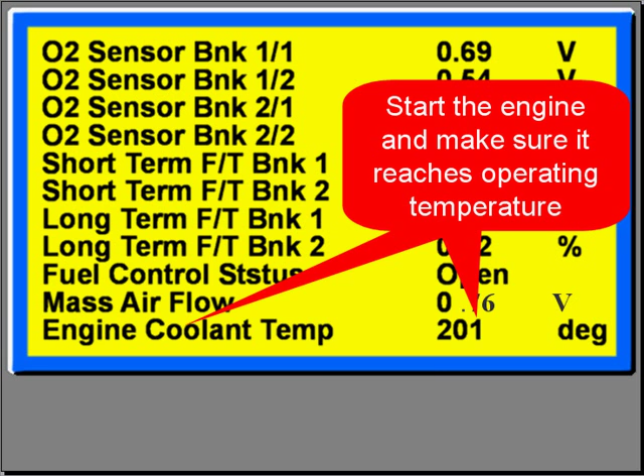Start the engine and make sure it warms up to operating temperature. Make sure the system closes loop. If the system doesn't close loop, check the oxygen sensor operation and the ECT. The oxygen sensors must be working normally before testing the fuel system.

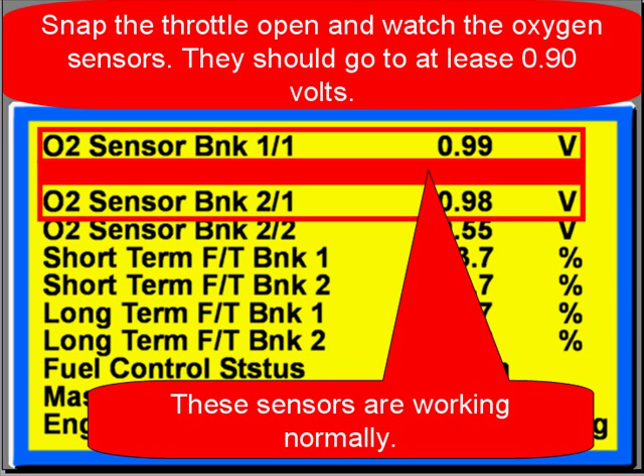Snap the throttle and watch the oxygen sensors. They should go to at least 0.9 volts, as in our example here where the sensors are working normally. These sensors are not working normally. When we snap the throttle, one went to 0.6, the other went to 0.4. They are not working normally.

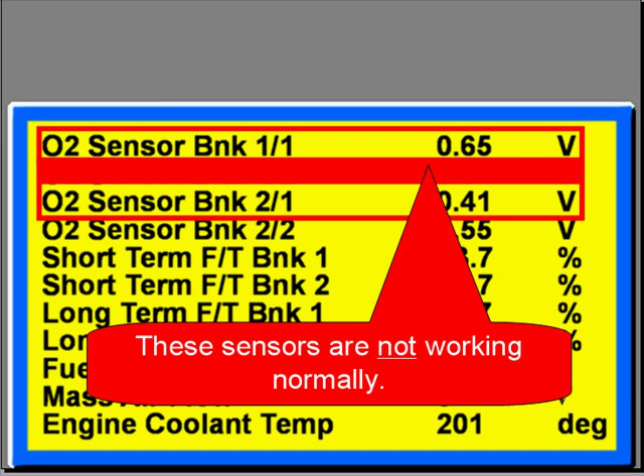If the sensors don't respond normally, add propane to the engine to see if you can get them to measure a rich condition. If the sensors respond normally with propane enrichment, go to fuel pressure volume testing and find out why you're not getting enough fuel on the snap. If the sensors do not respond normally with the propane, replace the oxygen sensor that does not respond. In this case, we're showing you one sensor has to be replaced.

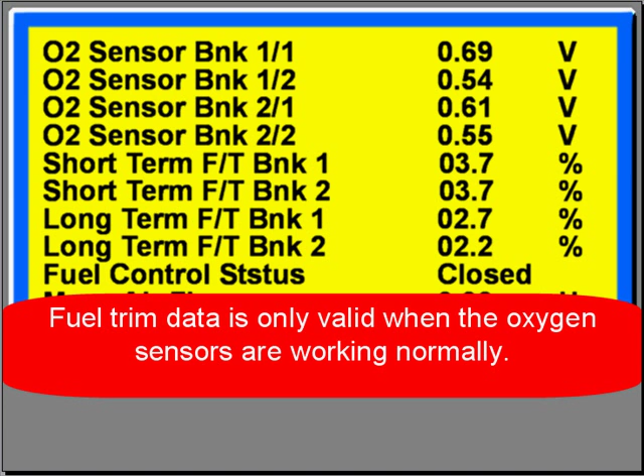Fuel trim data is only valid when the oxygen sensors are working normally. That's why we had you do them first. Look at long-term fuel trim. Ideally, it should be under plus or minus 5%. In our example, they're under 5%.

On vehicles with high mileage or not maintained that well, you're going to have to put a fudge factor in there. So long-term fuel trim should not exceed 10% in those cases. You can see that they're under 10% in our example here, but they're over the ideal 5%.

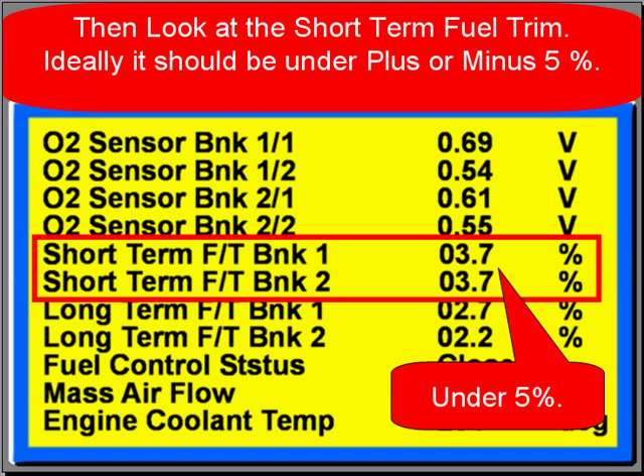Then look at short-term fuel trim. Ideally, once again, it should be under plus or minus 5% like our example. On vehicles with high mileage, put the fudge factor back in and use under plus or minus 10%.

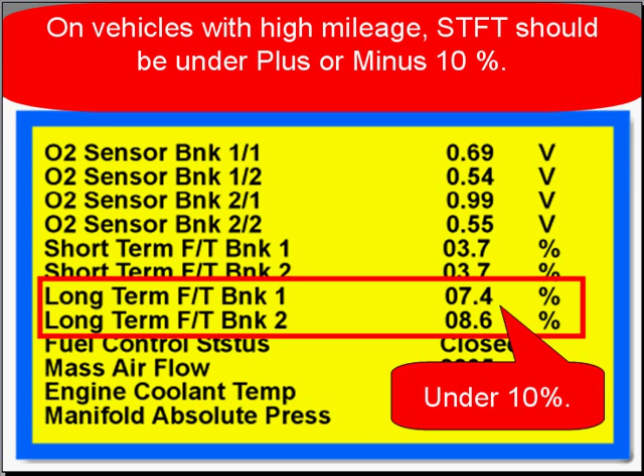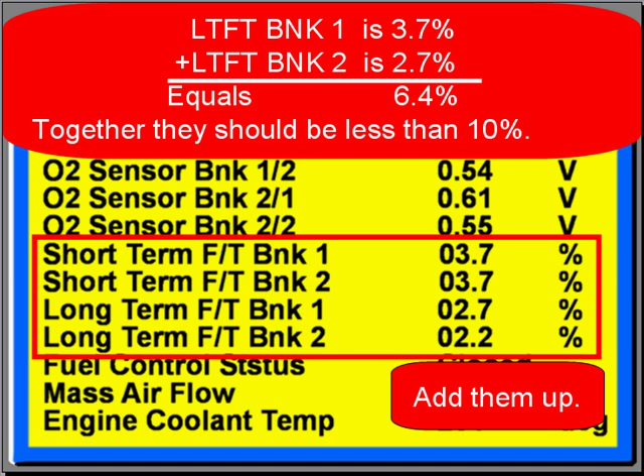Add long-term fuel trim and short-term fuel trim together. Just add them up, all of them. In our example here, we come to 6.4%. Together, they must be less than 10%.

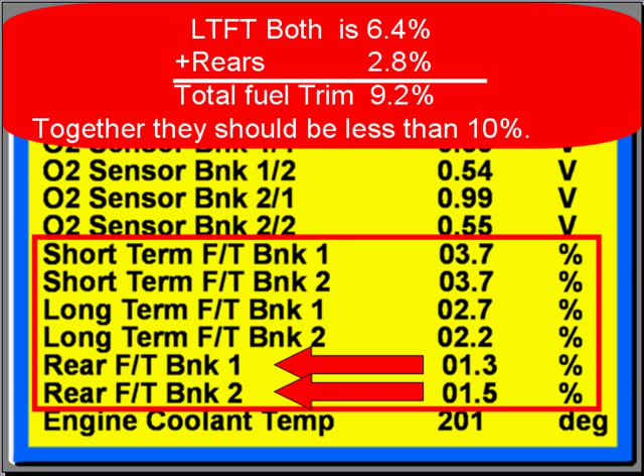To get total fuel trim, add the rear oxygen sensor voltage or percentage in, and in this case we have 9.2. Altogether, they should be less than 10%, and our 9.2 shows that. If together they are less than 10% and the oxygen sensors are good, the vehicle doesn't have a fuel control problem.

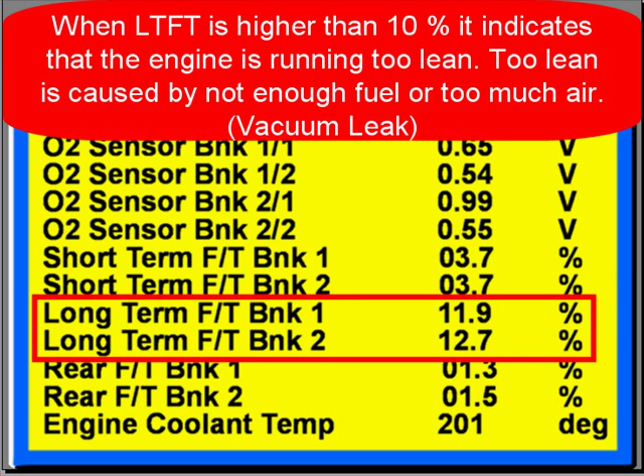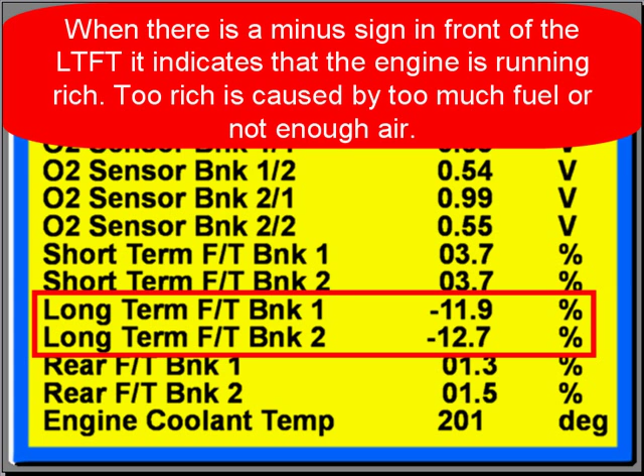When long-term is higher than 10%, it indicates the engine's running too lean. Too lean is caused by not enough fuel or too much air, a vacuum leak. When there is a minus sign in front of the long-term or short-term fuel trim, it indicates the engine's running too rich. The minus is subtracting. Too rich is caused by too much fuel or not enough air.

Use total fuel trim by adding all the fuel trims together. If you're working on high mileage or poorly maintained vehicles, allow a higher than 10% total fuel trim value. You're going to have to use your experience, and your gut tells you how much higher. In this example, long-term fuel trim is too low.

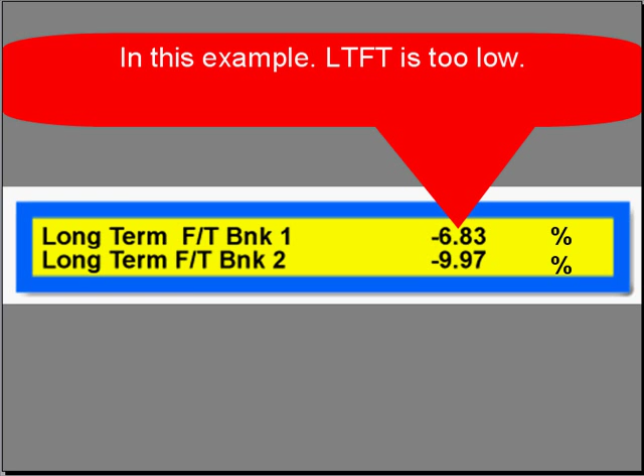Now look at these examples. We're going to give you some vehicles that we've seen. You can see that long-term fuel trim is under minus 5. The PCM is subtracting fuel, the minus sign, because of a rich condition. Long-term fuel trim is too high in the second example. The PCM's adding fuel because of a lean condition.

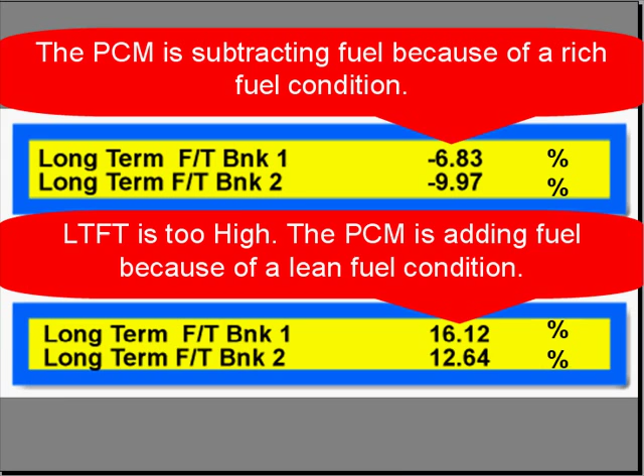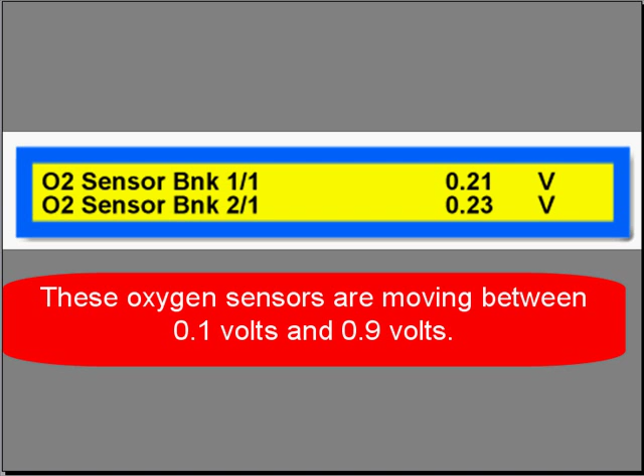You need to compare long-term fuel trim with the oxygen sensors. Normal oxygen sensor voltage is continuously moving between 0.1 and 9/10 of a volt, just like this example. The oxygen sensors are moving between 0.1 and 0.9 in this example, indicating to us that the oxygen sensors are good. In this example, we have a commanded rich condition.

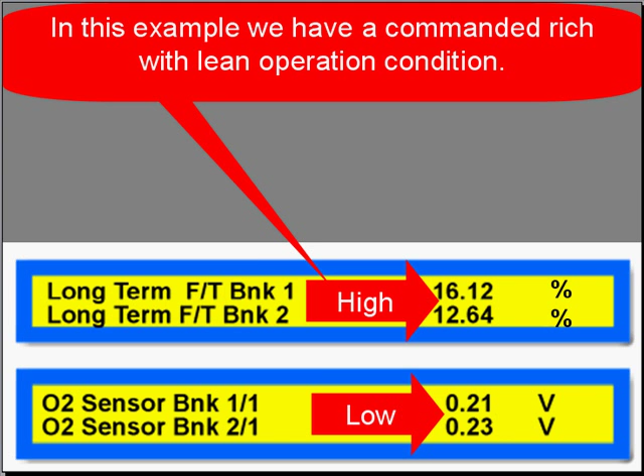The long-term fuel trim is higher than normal, and we have a lean operation condition. You can see that the oxygen sensors, both of them, are lower than normal. If long-term percentage is higher than normal and the oxygen sensor voltage always remains low, it doesn't cross, it always remains lean, go to vacuum leak test.

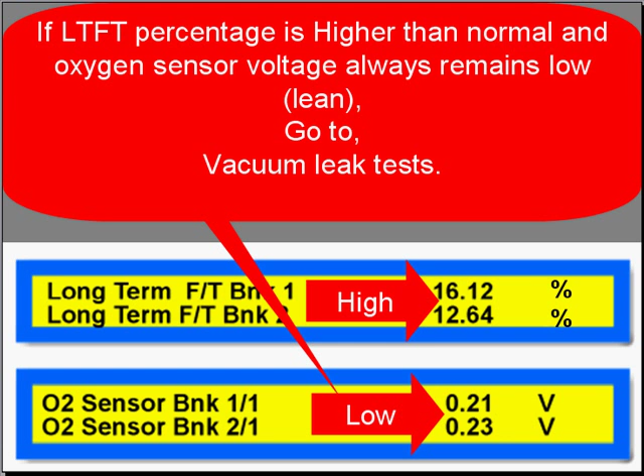Now in this case, you would be looking for a vacuum leak that would affect both banks because both sensors are too lean. If no vacuum leak is present, go to fuel pressure, fuel volume testing, and find out why you're not getting enough fuel.

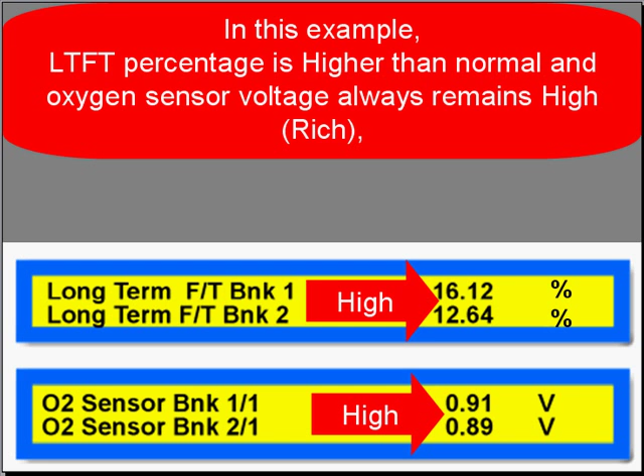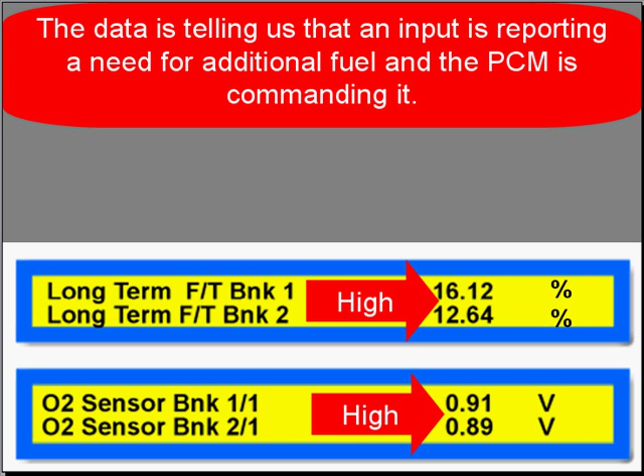In this example, long-term percentage is higher than normal and oxygen sensor voltage is always high. It always remains high, rich. The data is telling us that an input into the computer is reporting a need for additional fuel, and the PCM is saying, hey, I'm going to send it. The additional fuel isn't needed, and that makes that an invalid command.

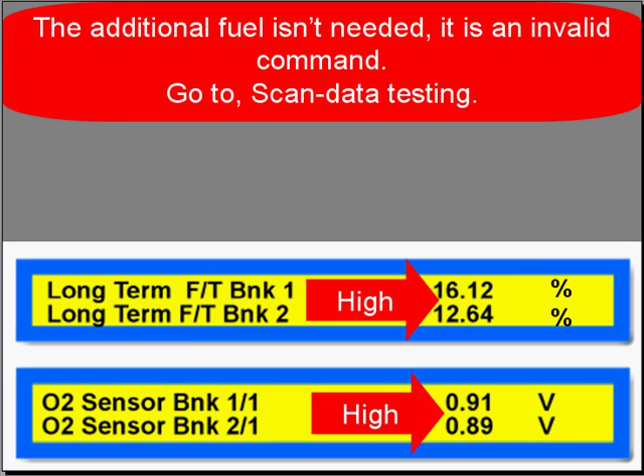Go to scan data testing and find out which data bit is incorrect. Here's a different example. If the oxygen sensors are switching normally and long-term fuel trim is higher than normal, the data indicates that this is a valid command.

What we're saying here is just because long-term or short-term is higher or lower than normal, that doesn't mean the oxygen sensor should stay rich or lean. What we're seeing here is long-term fuel trim shifting enough to make the oxygen sensors cross normally. This is a valid command because the oxygen sensors are switching normally.

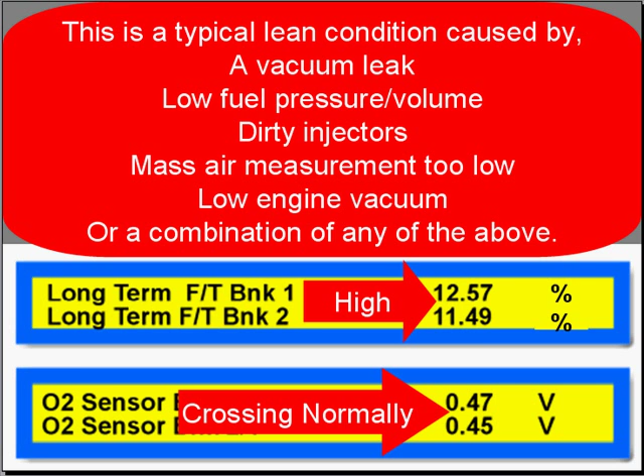This is a typical lean condition, caused by vacuum leaks, low fuel pressure or volume, dirty injectors. It could be a mass airflow sensor that was dirty and measurement is too low. It could be low engine vacuum, or a combination of any of the above.

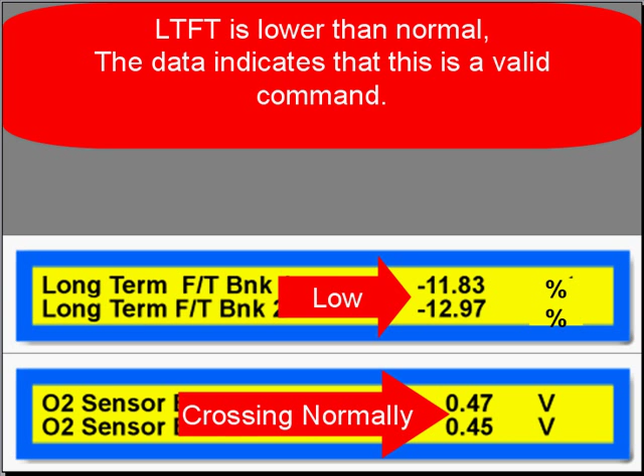In a different example, the oxygen sensors are crossing normally, and long-term is lower than normal. The data indicates that this is a valid command. In this case, the computer shifted low to make the oxygen sensors cross normally. This is a valid command because the oxygen sensors are switching.

This is typical of a rich condition caused by high fuel pressure, injectors that are dirty and leaking, mass airflow measurement that is too high, coolant temperature sensor measurement too low, or EGR position signal too high on a road test, or a combination of any of the above.

Use long-term fuel trim and the oxygen sensor information to get a direction in where to take your diagnostics, and what to test next in the fuel system. Vacuum leaks and dirty air filters are the most frequently missed problems found on all the vehicles referred to us. This is the end of this test sequence.

You should make a selection from the test menu based on your test results, or repeat the last test again to help identify the best test.